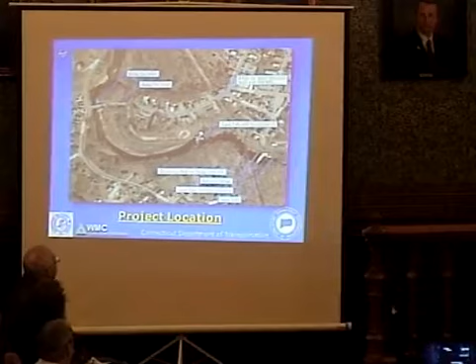So there's a couple other call-outs there. The Upper Falls Mill Dam, just so you can get an idea where you are. It's a blow-up of the intersection. So we're really looking at these two bridges as a project and the associated roadway work.

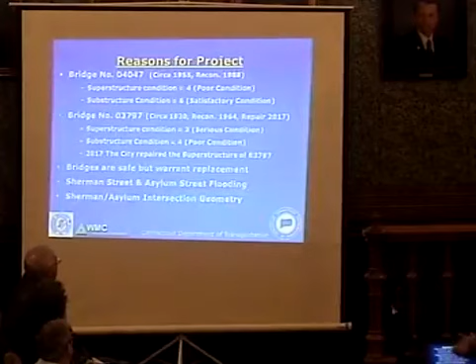Reasons for the project. The westernmost bridge, Bridge 04047, was constructed in 1955. Later on, there was some reconstruction work in 1988. The superstructure condition was rated poor, which is a 4. The substructure condition, a 6, is satisfactory. Bridge 03797, the Eastern Bridge, was constructed in 1920.

It was reconstructed and widened in 1964, and there have been some recent repairs in 2017. The superstructure for that bridge is rated 3, or serious condition. The substructure condition is 4, which is also poor condition. Like I said earlier, in 2017, the city did some superstructure repairs to that bridge.

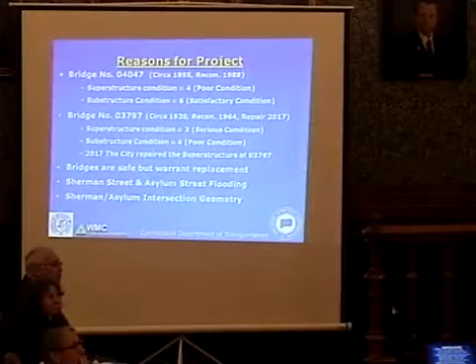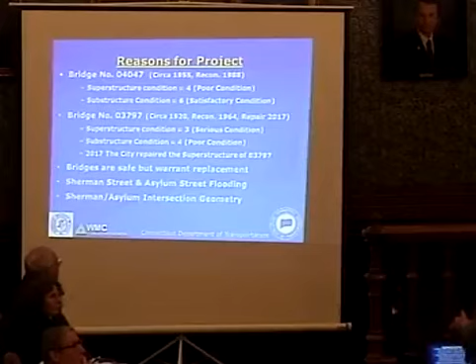Now, the numbers there, serious condition, poor condition, these are DOT ratings that they go through every 2 years. They inspect these bridges. Currently, the bridges are still in a 2-year inspection cycle. As those numbers go down, they get 1 year, 6 months, and so on. Currently, they're still safe, but they will warrant replacement. Another reason for the project is we're really trying to reduce the flooding on Sherman and Asylum Street.

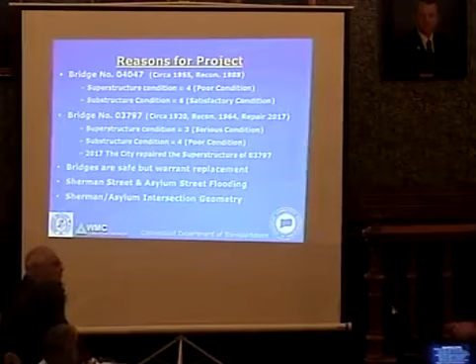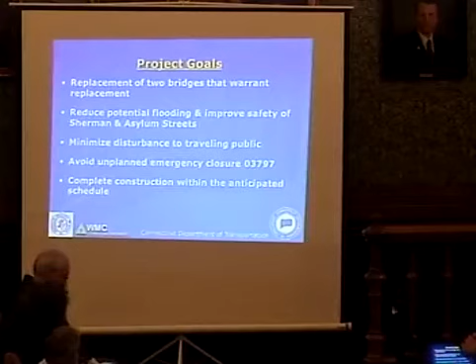And we're going to square off the Sherman and Asylum Street intersection geometry. Some of our project goals: we're going to replace the 2 bridges that warrant replacement. We're going to reduce the potential flooding and improve safety at Sherman and Asylum Streets. We're going to minimize disturbance to the traveling public. We avoid unplanned emergency closure of 03797. And we want to complete the construction within our anticipated schedule.

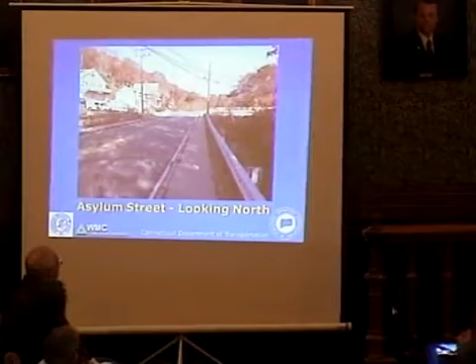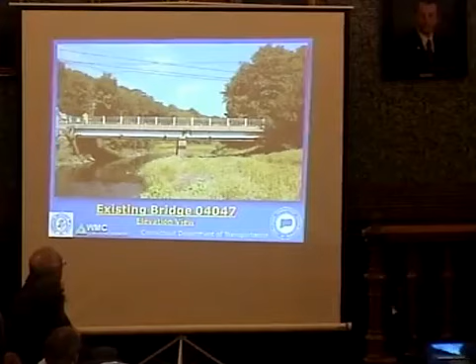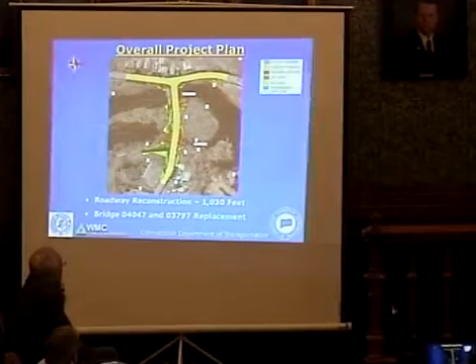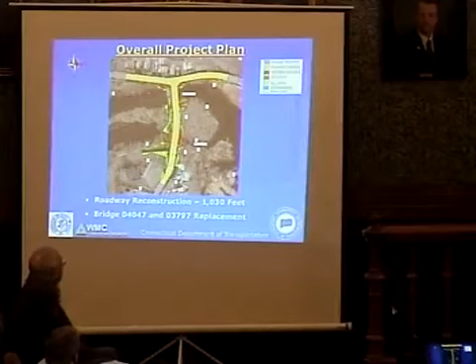Our overall project plan: we plan on both projects on Sherman and Asylum Street, which is highlighted there in yellow. We're going to do a roadway reconstruction of about 1,030 feet. And we're going to be replacing both the eastern and western bridges. The orange are actual structures. The green are areas where we're going to be filling in. And the light browny orange is actually areas we're going to be cutting.

On Asylum Street, there's approximately 525 feet of roadway reconstruction. We plan to raise the profile at the intersection by about 18 inches, and that's at the intersection of Asylum and Sherman Street. And then we're going to taper down and connect into the existing roadway. That raise in profile requires us to install a retaining wall along Asylum Street, or we're going to be filling in the river, and we don't want to fill in the river. We want to keep it open so the water can flow through.

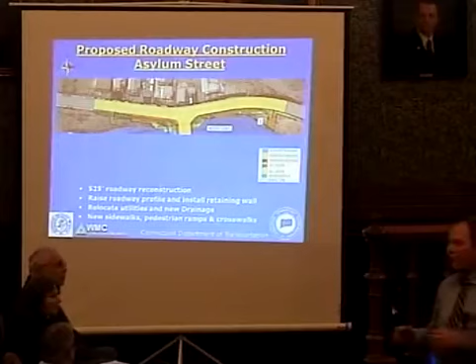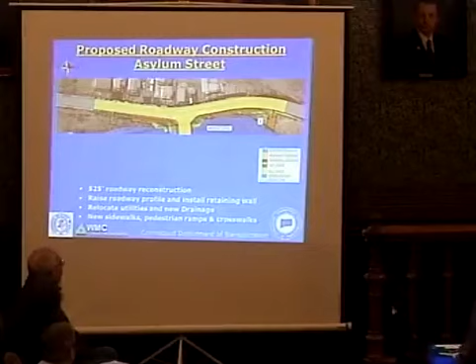Part of this project, we're going to be relocating all the utilities and the drainage on that road. There's a lot of utilities. It's very close to the existing bridge, and in order for us to get in there and construct the bridge, we'll need to relocate them. So we're going to try to push them more to the west, to that western sidewalk. That way the contractor can work on the bridge abutments and the retaining wall with less stuff in his way or her way. So like I just mentioned, we're going to be putting new sidewalks in, new pedestrian ramps, and new crosswalks as part of that project.

On Sherman Street, we're going to realign it slightly to the north. So you can see to the left of the screen, there's that little gray area, which is the existing bridge. So we're going to square it, pretty much make a 90-degree intersection instead of having that skewed, hard right turn from Sherman Street. We're going to try to make that a 90-degree turn.

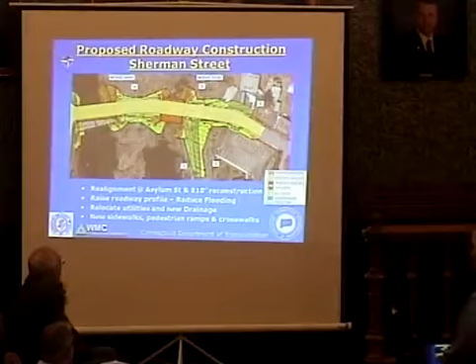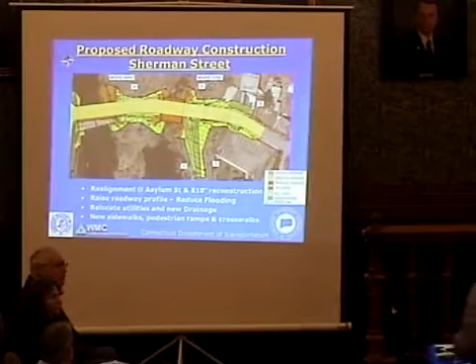We're going to be raising that profile to help reduce flooding. And like I was saying, that green area is the areas we're going to be filling in. So as we raise that profile, we're going to have to grade out existing earth to make up for that difference. We're also going to be relocating and installing new drainage on Sherman Street, new sidewalks, pedestrian ramps, and crosswalks. Currently, the existing sidewalk is to the north side of the bridge, and then you come across Sherman Street to Asylum Street, and then you have to cross the road. We're going to propose to extend that sidewalk on the southern side past the park entrance down the southern side of the bridge and connect it to the sidewalk on Asylum Street.

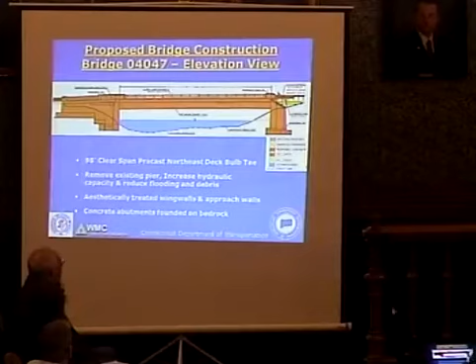This is an elevation view, similar to the picture, but this is a colored up view. We're going to install a 98-foot clear span with a precast northeast deck bulb T. We're going to remove the existing pier to increase the hydraulic capacity and reduce flooding and debris. Our wing walls are all going to be aesthetically treated with a concrete form liner. At this time, the city is discussing using a natural stone-looking form liner, which mimics the look of real stacked stone. The concrete abutments will be founded on bedrock.

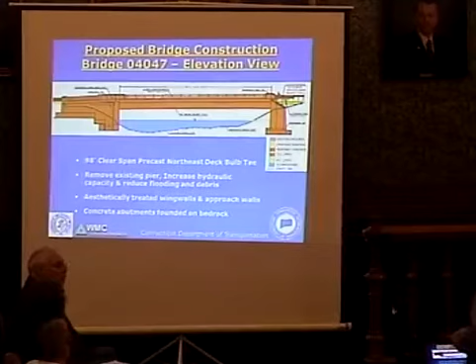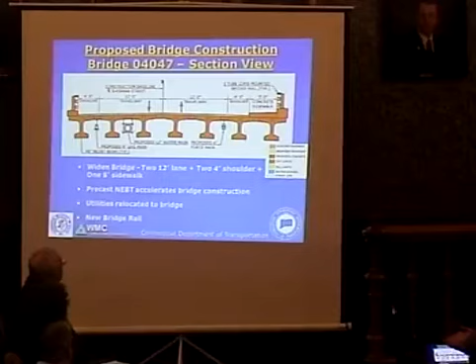So we're going to widen the bridge. It's going to consist of two 12-foot travel lanes, two 4-foot shoulders, and a 5-foot concrete sidewalk. Utilities are going to be relocated on the bridge. We're going to install a sewer pump station. We're going to pump the sewer across the bridge so it's not hanging down below in the flood waters. We're going to tuck it up inside the bridge structure. We're also going to install a new water main and gas main on that structure. We're going to install a new bridge rail on the bridge as well.

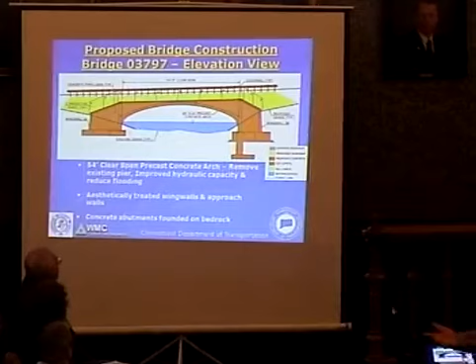The Eastern Bridge, this is an elevation view of the Eastern Bridge. This bridge, we're planning to do a 54-foot clear span precast concrete arch. We're going to remove the existing pier so we can improve the hydraulic capacity and reduce flooding. We also are going to treat this bridge with that form liner that I mentioned on the previous slide. Both the concrete abutments will be founded on bedrock.

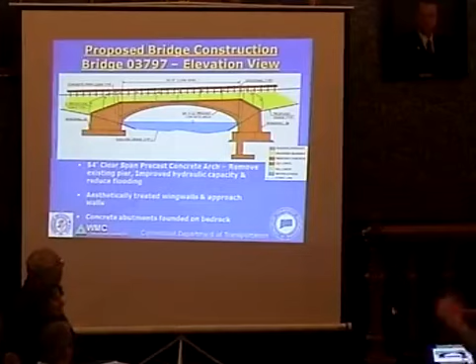This bridge will have MBR guide rail because we're making this bridge a little longer than the other bridges, and we're going to slope the earth out on the side. So we're going to have guide rail, a typical guide rail you'll see driving along the road. So we're going to cross that bridge and there'll be no bridge rail on this.

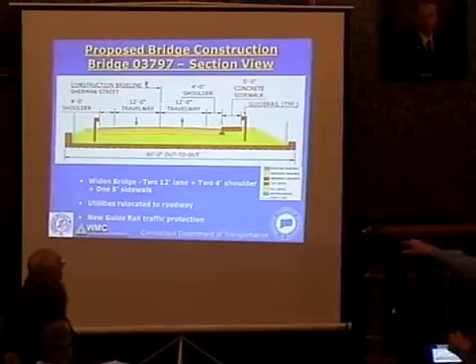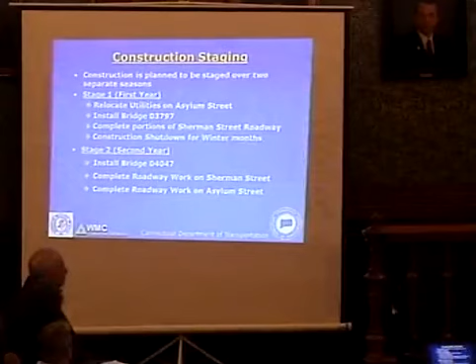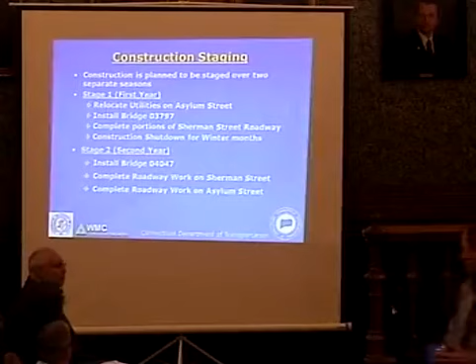This project is planned to be staged over 2 separate seasons. Our first season, we'd like to relocate the utilities in Asylum Street. Like I mentioned before, there's a lot of utilities out there. We want to do the work we need to do to get them out of the way. Also that first year, we want to install the easternmost bridge, the 03797, with that precast arch. And we want to complete portions of Sherman Roadway to allow traffic to be open to the public as soon as we complete the Eastern Bridge.

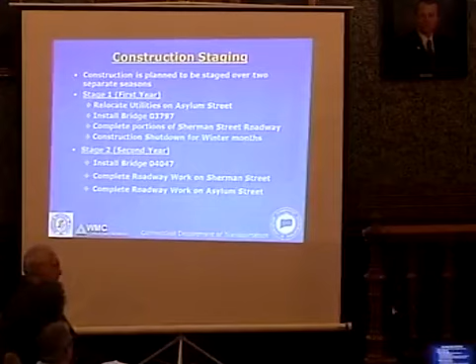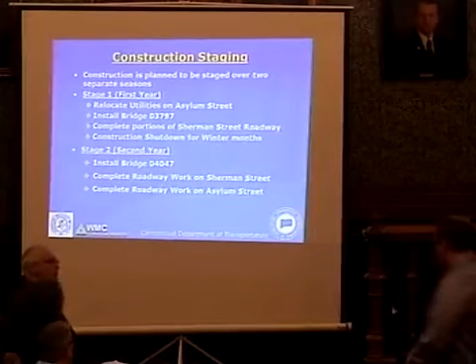And then after winter comes, we're going to shut down for the winter, open up everything, and then come back in the spring in our second year. That year, we plan to install the Western Bridge, 04047, complete all the work on Sherman Street, and then complete all the roadway work on Asylum.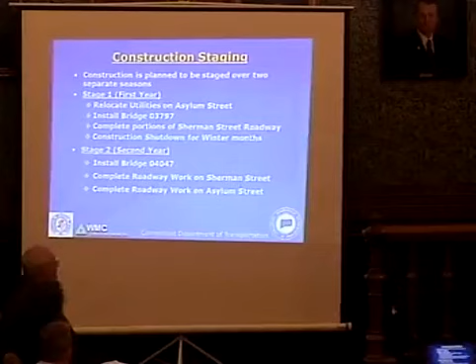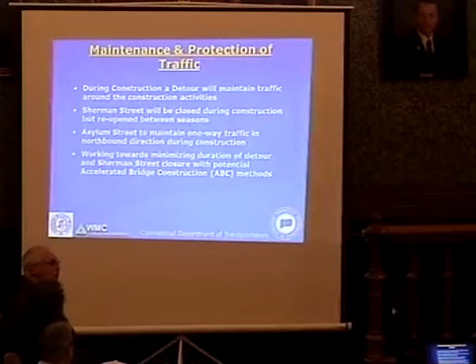We're working towards minimizing the duration of the detour and Sherman Street closure with potential accelerated bridge construction methods. As mentioned before, we talked about the bulb T with the beam being wider at the top, and the precast arch. Those are some of the things that we're doing. We're also going to look at more methods to decrease the amount of time the bridge will be detoured.

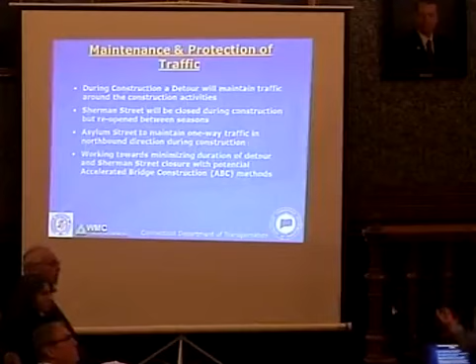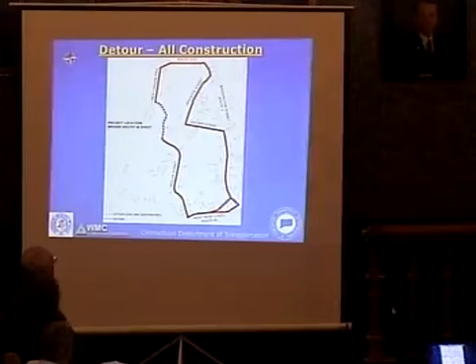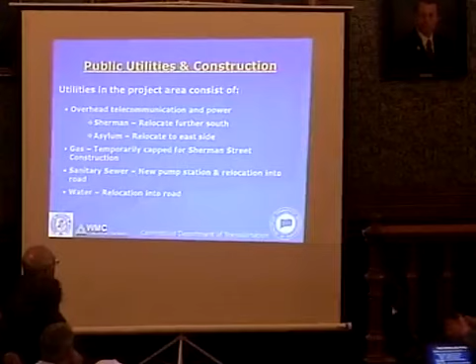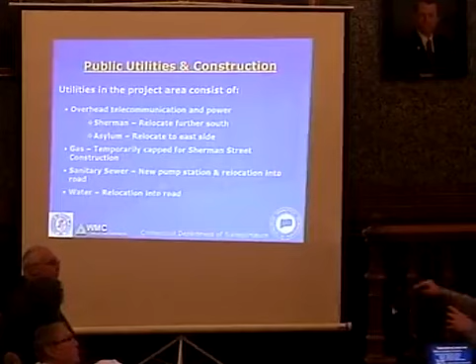The gas will be temporarily capped during construction, reinstalled by the winter time, and then capped again in the next spring to complete the work. As I mentioned earlier, we're planning to put a new pump station and relocate into the road. So we want to put a new pump station in, let it feed gravity down to this pump station, and then we're going to pump it over the bridge. So that pipe that I showed you earlier on that elevation view is not hanging in the water. It's going to be tucked up under the bridge. And we're also going to relocate the water into the road.

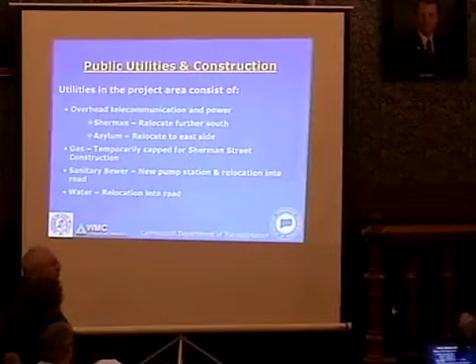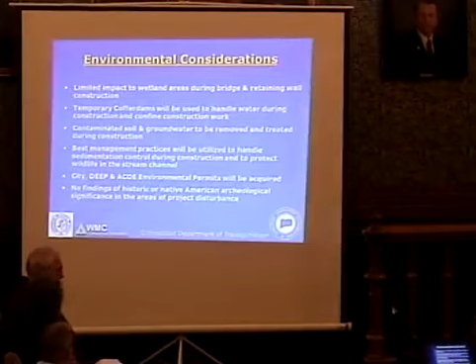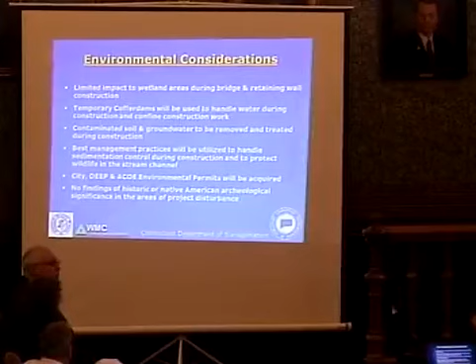Some of the environmental considerations: we want to limit our inland wetland impacts during the bridge and retaining wall construction. We're going to use temporary cofferdams to handle the water and confine construction work. Contaminated soil and groundwater will be removed and treated during construction. Some of that material out there is known to be contaminated. If the level of contamination is too bad, it's going to be shipped off and treated properly.

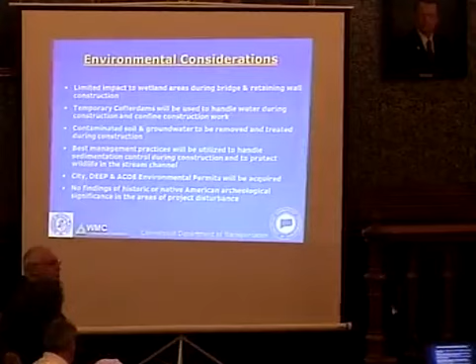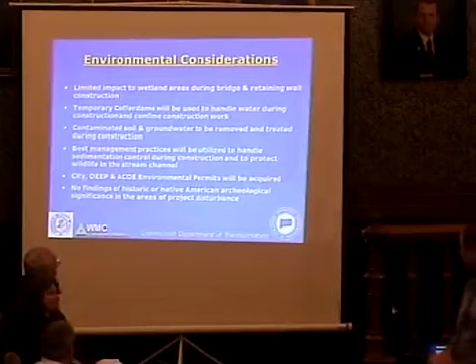Best management practices, such as silt fence, hay bales. You might not know what best management practices are, but they're things that we can do to keep siltation out of the river, things that we can do to help protect the environment. So we plan on implementing a lot of those best management practices during construction. We will be required to get city, DEEP, and Army Corps environmental permits as part of this project. We had an archaeological study performed, and at this time there were no findings of historic or Native American significance in the area.

Rights of way. As part of this project, rights, easements, and minor acquisitions will be required based on our preliminary design plans. They are preliminary, and they're going to be subject to change. Right now we do have some plans here, so if you are a property owner and you'd like to come up and see what kind of work's going to be done around your property, feel free to talk to me after the presentation. Dennis McDonald is a project coordinator from the Department of Transportation. He'll be here to explain some of the right-of-way process for you.

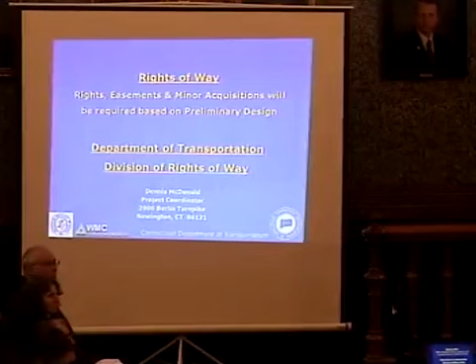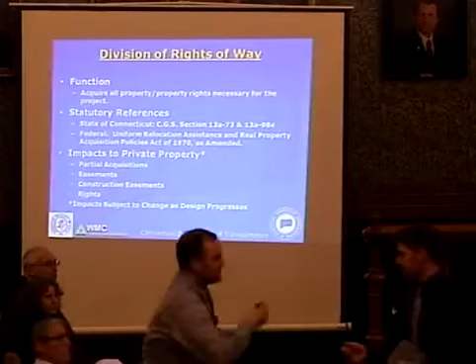Good evening. My name is Dennis McDonald. I'm a representative from the Connecticut Department of Transportation Division of Rights-of-Way. I'm just here tonight to briefly speak and explain a little bit about the rights-of-way process.

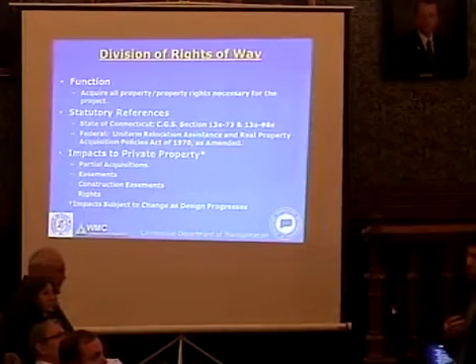So essentially, the function of the Division of Rights-of-Way is to acquire all property and property rights necessary for the project. This is done in accordance with Connecticut General Statute Section 13a-73, 13a-98e, and the Uniform Relocation Assistance and Real Property Acquisition Policies Act of 1970 as amended. Now, as John just explained, right now we're looking at some partial acquisitions, easements, construction easements, and rights. This is subject to change as the design progresses, but it gives a general idea of what we're looking at.

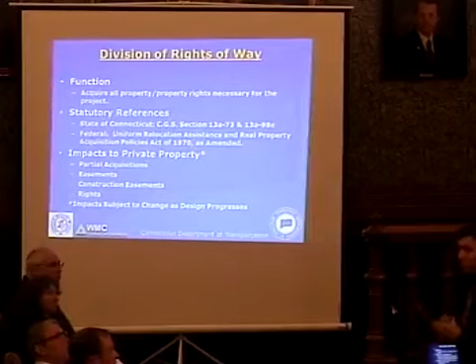So the right-of-way process. Once property impacts have been determined, each impacted property owner will receive a letter of intent to acquire. This essentially initiates the right-of-way process and provides a little explanation of how the process works. Soon after the letter is received, a valuation process will take place, and once a value has been established, a written offer of compensation will be made to each impacted property owner. The offer comes in the form of a letter and provides a detailed breakdown of the specific property impacts and the dollar value associated with each impact.

Property owners will be given time to consider the offer and negotiate should they wish. If an agreement is reached, an acceptance document is signed, and a closing will take place approximately 30 to 90 days later. If an agreement cannot be reached for whatever reason, the state will utilize its power of eminent domain and acquire through the condemnation process. Now, I understand this does have a very negative connotation, but many times this is done to keep a project on schedule. And if the state does elect to pursue eminent domain, the original offer is deposited in the court system, available for withdrawal at any time, and property owners can continue negotiations or file a formal appeal for reassessment of damages through the court system.

If the property owner elects to file a formal appeal, it must be done within 6 months from the date the state files for eminent domain. And that's essentially the right-of-way process in a nutshell. If anyone has any questions, I'd be happy to answer them at the conclusion of the presentation. And I also have with me tonight a question and answer brochure if anyone would like a copy. I'll turn it back over to John now. Thank you, Dennis.

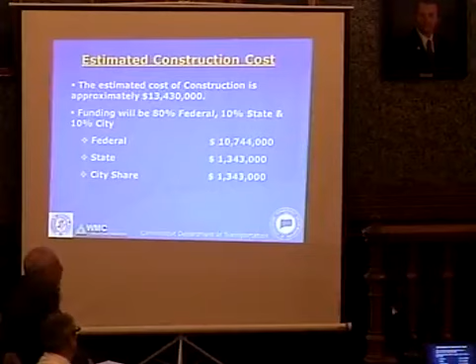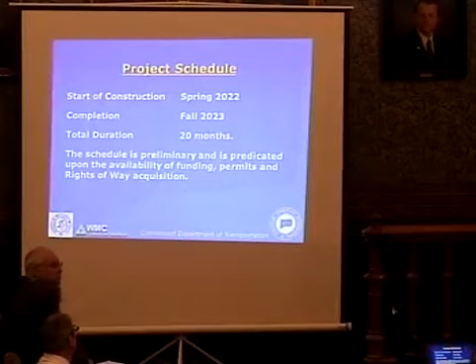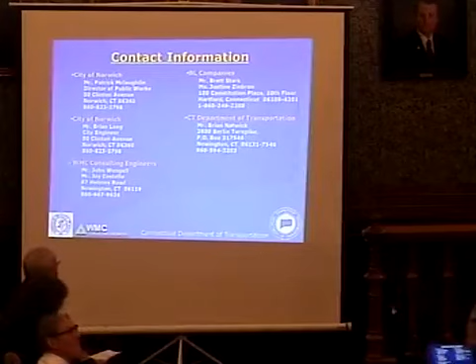This whole presentation will be on the City of Norwich's website. So you'll be able to access this to get any of that contact information, review any of the plans, go over the presentation in the comfort of your home. Also, Mr. Brian Natwick, he's from the Department of Transportation. He'll be the project manager and coordinator for the DOT. Thank you. I'd like to take any questions and answers, or Q&A at this time.

Yes, sir. When the project is done, when Sherman comes out onto Asylum Street, will that be cut square, or will the corners be rounded? Corners will be rounded. Will tractor trailers be allowed to use it? It's very tight there. It's going to be very limited. Because it is so tight. Yeah. The last time a tractor trailer used it, it took down guardrails. And every time a tractor trailer takes down guardrails, they run. I know because I was a truck driver. They run, and the city pays for it.

We plan to realign to make it 90 degrees. We're also going to widen the bridge, and we're going to be putting radiuses in there because we know that is an existing problem. So that's one of the reasons why we wanted to move it to the north and make it straight, so it'd be a little easier. Now, it's still tight because that Asylum Street is still right there. So it's going to be very, very tight for tractor trailers to make it, especially if there's oncoming traffic.

I'd like to touch base on what he said. They've actually taken the corner of that bridge down twice in the last year. One of the gentlemen from the city, when they came to replace it, said just the piece was like $2,500. That said, it should never be tractor trailers going down that street. Right now, once a week at least, a tractor trailer almost gets stuck. They're constantly hitting the side of the bridge or the guardrails. And I don't know why tractor trailers are allowed on Sherman Street or on Asylum Street. They're too narrow and they're too windy.